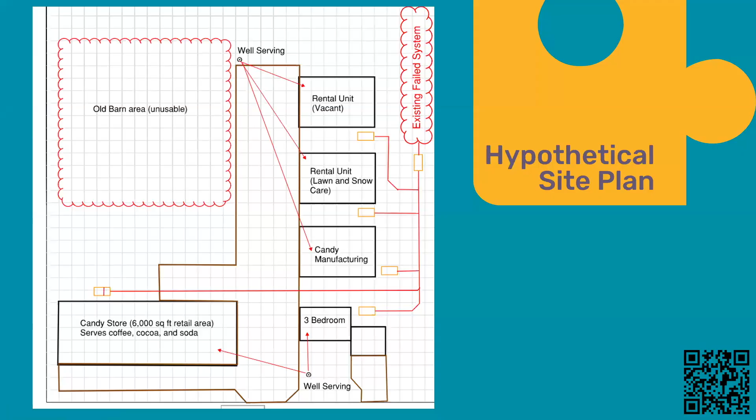So why this example? Well, mixed sites like this are just becoming more common. We see them more and more often across the state. We could swap out this scenario with something like a brewery that also has a restaurant and an Airbnb attached to it. And the underlying concepts would basically be the same. We have an industrial, commercial, and a residential use all on one POWTS.

I specifically chose those commercial rental units because they're also becoming increasingly common across the state. Sometimes they're called man caves, business condos, business incubators. They go by a bunch of different names, but the concept is the same. The structures are rented out to businesses or individuals, and there's often really limited control or knowledge of the flows and loads at the time of design. So we want to take that into consideration.

So this example lets us walk through many of the considerations that come up during the planning phase of the POWTS. And while these systems must follow the same rules as any other system, the added complexity often means that additional requirements that we wouldn't typically consider, and less common situations, are just more likely to occur. So when we look at a system like this, it's natural to feel unsure about where you should begin. Where do we even start with something like this?

Before a system can be designed and submitted, and we're not even talking about installation today, but before all of that, there's several key questions that need to be answered. And this isn't the only way to approach a project like this, but for the sake of giving a presentation, I have to come up with a process. So this is just kind of what we're gonna follow here. So first, we need to understand why the system is failing. We don't want to repeat our mistakes.

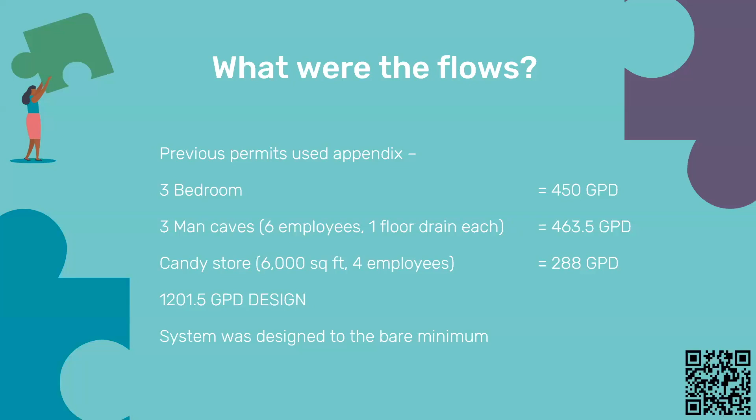So if you think back to how I described this site earlier, you might already notice that some of the sources of flows are not accounted for in this original design. And that's something that happens a lot. These uses, we design for them and then they grow over time. But if we look at what the flows are now, remember, it's all hypothetical.

Since the system was originally installed, the candy shop has added drinks and more staff. Those man caves, despite being one vacant, still have a total of 18 employees and 3 floor drains. So that portion of the flow really is unchanged. And the residence also remains a 3-bedroom home. So it doesn't look like it's changed that much, but we really want to see.

And the best way to design a replacement system is to use actual metered flows because they reflect real world usage and show peak days. We want to know if there's a peak day in there. In addition, the appendix in its current form will probably never address industrial uses because that's the DNR, but it also doesn't accurately capture uses like coffee shops and things like that. Coffee shops are not in the appendix currently, and they're actually pretty difficult to characterize without metered flows.

And unlike waste strength, there's very little that we can do to reduce flow besides actually reducing the usage. So if the failure is partially flow related, designing with accurate data is critical because we need to know the actual flows. So in order to obtain this data, we need to do daily meter readings. And meters should be installed in a way that excludes any water not discharging to the POWTS, so think about irrigation or something like that.

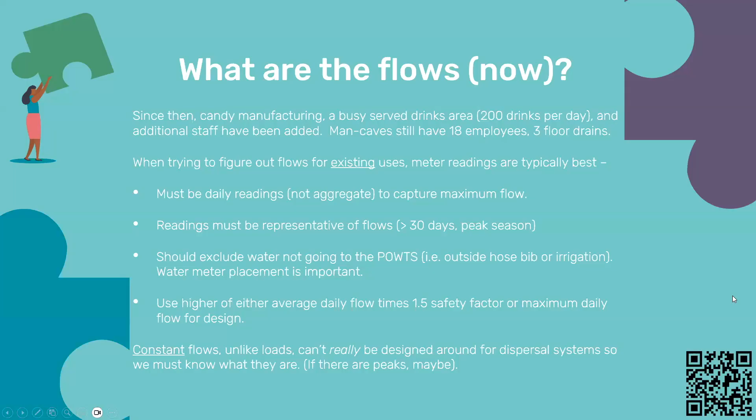And for design purposes, we should use either the maximum daily flow or the average daily flow multiplied by 1.5. And this is because POWTS are designed with a 50% safety factor for peak days. Systems are not designed and meant to be operated at their design flow every day. That design flow is a safety factor. So if we're operating at it every single day, that's actually not what it's designed for.

So here are our meter readings. I made them up. The average daily flow times 1.5 comes out to 1,145.9 gallons per day for all of the uses combined. Everything was metered here. And the peak day flow is 1,857. So just return to our context. The original system was designed for right around 1,200 gallons per day.

So which flow would we use to design the replacement system? Under code, the peak daily flow must be used because it is the larger of the two, which means that the replacement system would need to be designed for a minimum of 1,857 gallons per day. Like I said, meter readings can also provide valuable insight into flow patterns. And that information can be used to help determine whether options like flow equalization could be beneficial.

So with flow equalization, additional tankage is used to temporarily store large flow events and then dose them out to the soil treatment area over several days. So this can allow for a smaller treatment area than would otherwise be required based solely on that peak daily flow. And it's especially useful for facilities that see high flows only occasionally, but regularly. So things like churches, where you're seeing most of your flows on Sundays and maybe Wednesdays, wedding barns, sporting venues, things like that.

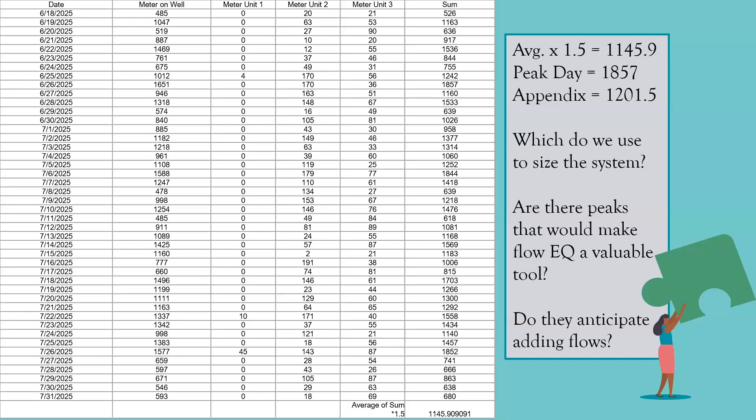And another important question to consider when reviewing flow data is whether or not the facility anticipates future increases in flow. So, we don't want to design for today when tomorrow is going to be different. So when we look at these meter readings, there's really no clear pattern of peaks. So flow equalization isn't possible. There's not like it spikes on Monday and then there's nothing the rest of the week. So flow equalization is not going to help us out here. And that's just something you want to keep in your toolbox and remember.

We also want to note that one of those man caves is currently vacant. So if we estimate its flow during the peak day from the other unit, that would add an additional 191 gallons per day. But this is really tricky because we don't know what the next tenant is going to be. Is the next tenant going to be a guy who just stores his car there and doesn't use any water? Or is it going to be something that has 20 employees? We really don't know. And that's why these uses are so tricky.

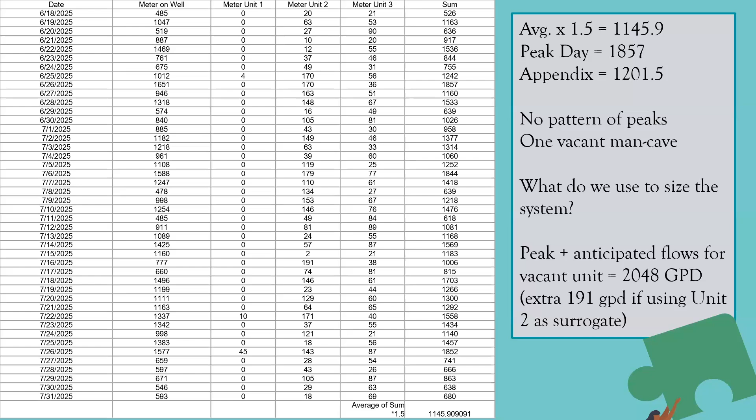Anyway, if we use 191 and we add it all together, the design flow totals up to 2,048 gallons per day. So it's easy to see why that original system isn't working in this case. The flows are higher than it was designed for. But flows are just one piece of the puzzle. Another critical piece is the waste strength or loads. So if we look back at the original permit, all those uses were domestic strength, and the system was designed for domestic strength wastewater. That's what it was intended for.

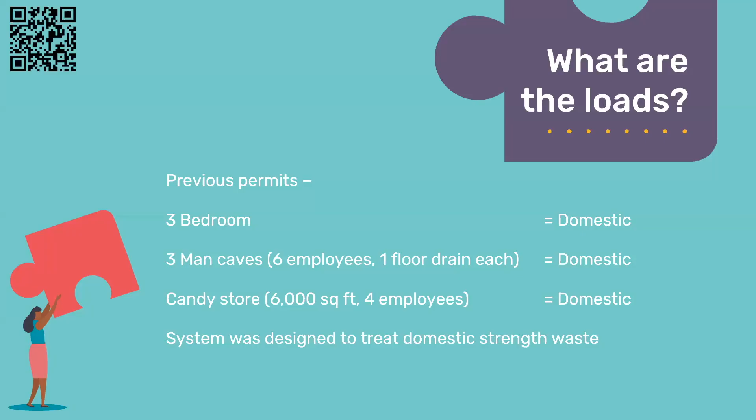But if we look at the current wastewater strength, it's a lot more mixed. So the house and two of the man caves remain domestic strength. I mean, one is vacant, but one is domestic. But that candy manufacturing process that was added introduces an industrial strength waste stream, which could also be high strength because it's food related.

I don't really know what they're doing in there, I guess. Even though I made up the scenario, I still don't know what they're doing in there.

But it's probably high strength because it's high sugar, high fat, high whatever. And the candy store also sells drinks that are made on site, which adds an additional high strength waste stream to this. Coffee shops, there's a lot of milk products, high BOD, high TSS, high FOGs sometimes, depending on what they're doing there. So it's high strength. So without testing the existing system, the replacement system would need to be designed to handle that high strength wastewater.

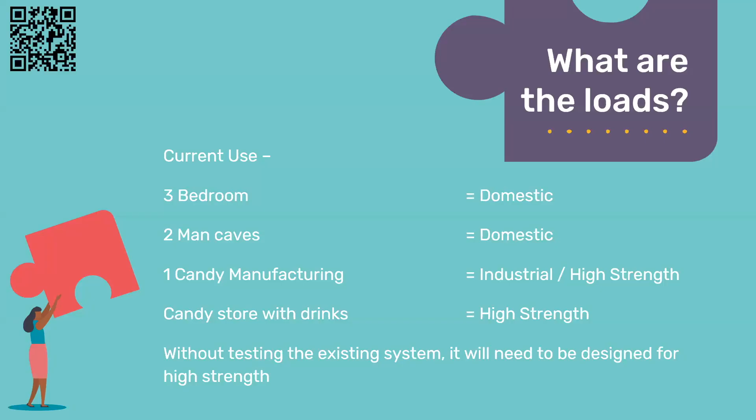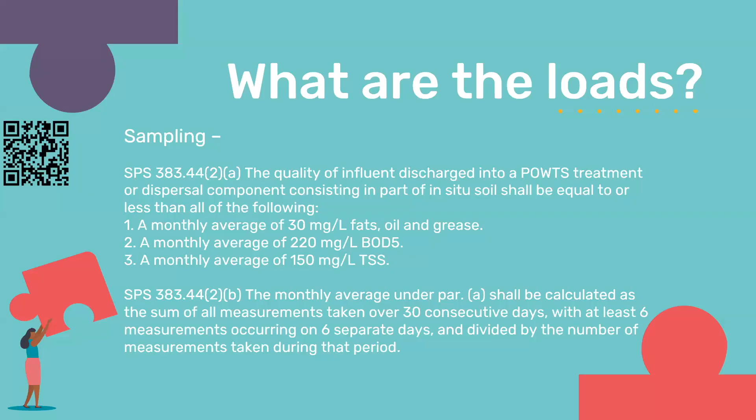So maybe the next step would be to test the wastewater. But what does the code say specifically about calculating out the wastewater strength? Well, it first specifies the strength parameters that effluent must meet before reaching the soil treatment area, and it also provides the sampling requirements. So the samples must be taken over 30 consecutive days with at least 6 measurements occurring on 6 separate days, and then it's the average of those samples. And that tells you whether or not something is domestic strength or high strength.

However, given that the existing system is failed, it's probably wise, although not necessarily required, to design for more than just domestic strength. Maybe you're adding in some extra treatment in the treatment train, like additional tank volume or additional field space, or maybe some form of pre-treatment, because we know that this is, well, it's not high strength. It's just about as close as it can possibly get.

So another part of the loads is the industrial component, which requires DNR concurrence for mixed wastewater. And what do we do about that? Well, the DNR is the one that would issue a concurrence letter for it, but their review requires much of the same information as DSPS, and they want some additional details.

So additional details that the DNR might require for their concurrence process would be the process that's producing the wastewater. And they typically also want to know the chemicals that are used for cleaning. They want to know more about what's going on internally to create that industrial wastewater stream. And they also need to know how the solid residuals are managed. That'll be a part of the concurrence letter.

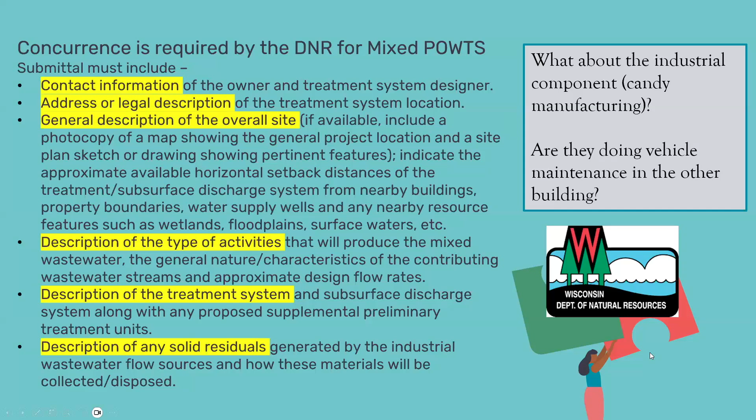So now we can kind of start to put things together. We know the flows, we know the loads, we think we understand the system issues. And from here, maybe we can move on to finding a site and then designing and submitting the system, the things that we kind of consider as the system design.

So if we return to our site plan, there are several things that we need to consider. When we're looking at siting a system, we want to know, what did the old soil tests show? Old soil tests aren't always perfect, but they can help you out. We want to know if the existing tanks and piping can be reused. These are things that you'd want to look at while on site. We want to know, is a grease interceptor required anywhere?

We want to know that if greasy waste is being created, then a grease interceptor is required. And if folks have questions about grease interceptors, I'm going to defer you to our general plumbing staff for that decision and guidance, as that is really in 382, which is under general plumbing.

We also want to look at if there is any practical reason to split into multiple systems. Would there be a reason to do that here? And then finally, after we know all these things, we want to take a look at where that soil treatment system, the new field, can go. Where can it be located?

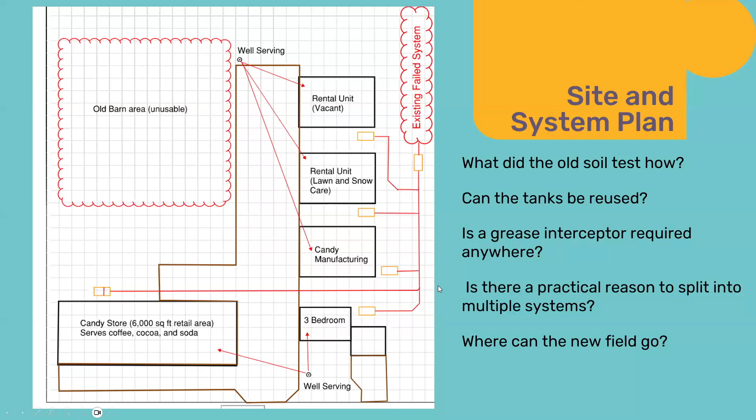So here's just a few specifics on our hypothetical site. So let's pretend this is located in the Glacial Lake Wisconsin basin. So recall what you learned from Matt last month. And we know that the soils are probably pretty decent here, so we're not super scared of them. It's not the Lake Superior clay basin. It's sandy soils. The previous soil test showed 0.7 soils with no limiting factor. It's just depth of excavation.

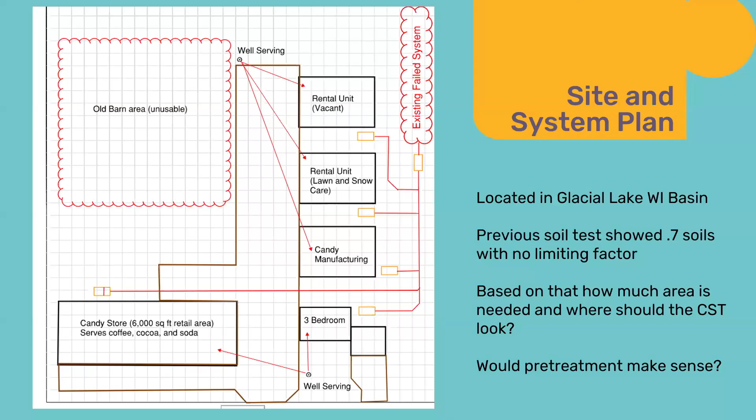So from this information, because we can maybe reasonably assume, we can start to think about what might be required even before going out on site. So we can get a ballpark of how much area is going to be needed and where the soil test area should be located. And then based on what we know about the plot plan, we want to think about whether pre-treatment would make sense before sending flows out to the field. Do we have such a limited area that we need to do it, or would it make sense to do it anyway?

So here's just a really rough calculation. With 0.7 soils and rounding up to 2050 gallons per day, we're going to need 2,929 square feet of soil treatment area. So maybe 3,000 square feet would be a good roundup there. And there are multiple areas on the property that could work. So which one makes the most sense? Well, from just a cost and practicality perspective, the option that requires the fewest moving pieces is probably the best option. Not always, but it's a good place to start.

So what about the existing field area? So here's the existing field area. Possibly we could go underneath it. Maybe that could work. There's 4,100 square feet there, just estimating. And since it's already going to be an ISD because it is a mixed POWTS, maybe it makes sense to remove the old system and replace it with a sand-based sand blanket system or something like that. It's already an ISD, so maybe we could put it there.

We also want to consider future land use when trying to figure these things out. So what if the owner wants to add an additional rental shed? So this is to the north of that existing one. Would that be a good place for a new system? There's enough area there, but what if the owner wants to put a new shed there?

Or what about the area just north of the candy store? What if they want to add a drive-through there or something like that? Just things to consider, and things to discuss with the property owner.

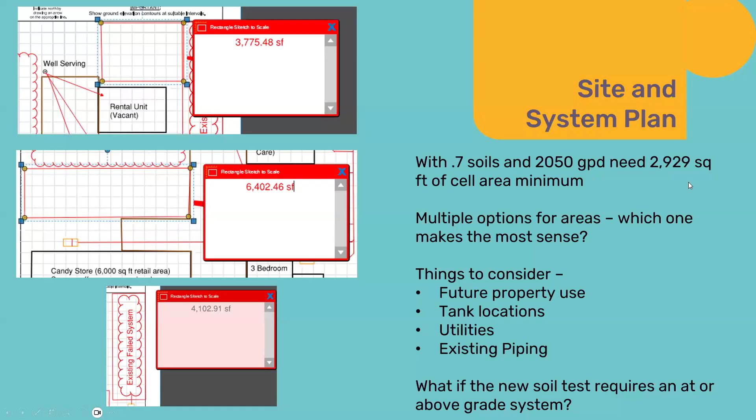And finally, we want to think about, what if the new soil test requires an at or above grade system? In that case, maybe it makes more sense to separate the systems as the entire system might not fit in one location. Just things to consider and to build in contingencies so that you're not kind of left stranded when you're out there. So as I mentioned, we won't be designing the system today, but if we were, here are just several considerations you would want to address.

So is dosing required? Yes, dosing is required since the flows are above 1,500 gallons per day. Is pre-treatment required? Not strictly, since the flows are domestic strength. Well, it would also depend on if the DNR is requiring some for their industrial component, but we might choose to include it. Is there anything else about this that an ISD would be required for other than that mixed waste? Because we would want to address that in the design.

Is pressure distribution required? Are additional tanks needed? That's something that you want to plan into the system. I'd say likely because the flows have increased. I didn't set any tank sizes in my example, but more than likely, especially with that change to the candy store. Can all the setbacks be met? Do we need variances too? And if there are any other site-specific considerations that you can think of, the questions are endless, but we want to think about them as we work through the process.

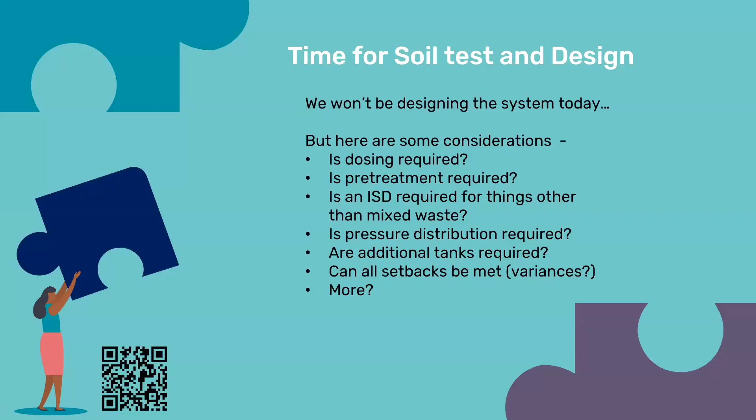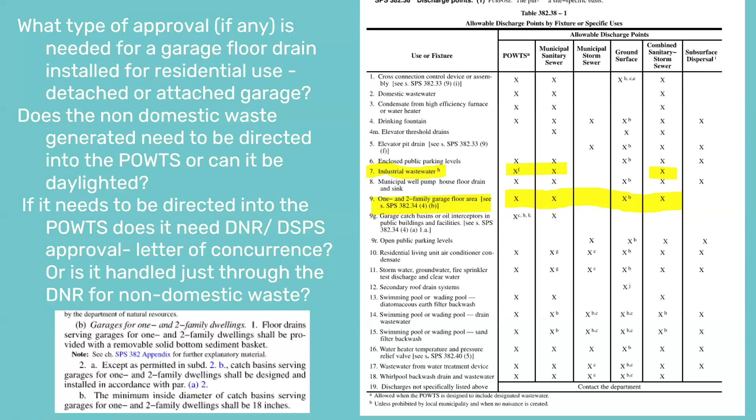It can go to the municipal sanitary sewer or the combined if it's allowed. But you notice that the ground surface is not an allowable discharge point for industrial wastewater. Because industrial wastewater is regulated by the DNR, they have some additional language on that for these motorized vehicle storage areas. And they're talking largely about public facilities and things like that. You'd want to talk to the DNR and General Plumbing about it more specifically. DSPS POWTS is probably the low man on the totem pole here.

But if the floor drain is receiving only snow melt or rainwater drippage, then generally, per the DNR's website, it can be connected to an industrial or mixed wastewater subsurface disposal system. But if that wastewater discharge from floor drains contains other materials, like salt, excessive solids, things like that, then generally it cannot be. And if there's any potential for future vehicle maintenance to occur in the facility, then the DNR probably is not going to grant approval for subsurface disposal, because there are specific rules about not putting oil down the drain.

So we had a question in the chat, and I think this just answers it: if it's just snow melt or rainwater drippings, then it could possibly go into a system. But if there's any kind of maintenance being performed there, then it would not be allowed to go into a subsurface system or POWTS. Yeah, it's really about the contaminants that are going into it.

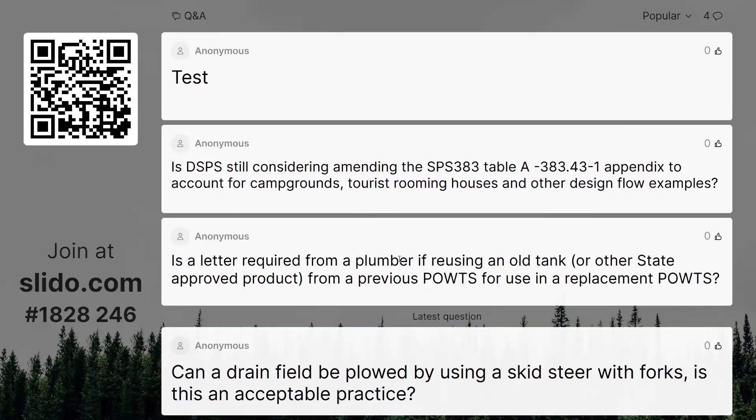If it was an old, hand-poured tank from the 80s and we don't have a lot of information on it, we'd still need somebody to take a look at it, make sure it's structurally sound, determine the size, et cetera. So it sort of depends on what we have, but yes, we would need to have not necessarily a letter, but somebody sign off to say they inspected or looked at it. Yeah, and some counties have specific forms that they want used for this because it outlines the information that they want to see.

Okay, so we have a question that came up in the chat. How much evaporation can realistically take place in a tank that is not in use over a 2-year time frame before putting up a red flag? And I would say to this, each system is unique. And so depending on how the system is outlined, I personally couldn't say how much evaporation could realistically take place. Some systems have way more venting and air movement than you would think would be normal, so there might be more evaporation. So I don't know, Matt, do you have?

Yeah, it's going to depend a lot, depending on how deep the tank is buried, like you said, how much venting they have there, the temperature of the soils, when it's used compared to when it's not used. There's a lot of variability in there, but again, if you had a 3 bedroom home connected and even with one person there, I'd still expect that their holding tank's going to fill. I assume this is a holding tank question. Their tank is going to fill up, and it's not all going to evaporate out faster than it's going to be filled.

So I think, or if it's an anaerobic tank, I would venture to say they're still going to have some liquid in it. And if there's not, then I would be asking some questions and looking at that system more carefully to figure out what's going on. Maybe it is, but I would still be concerned.